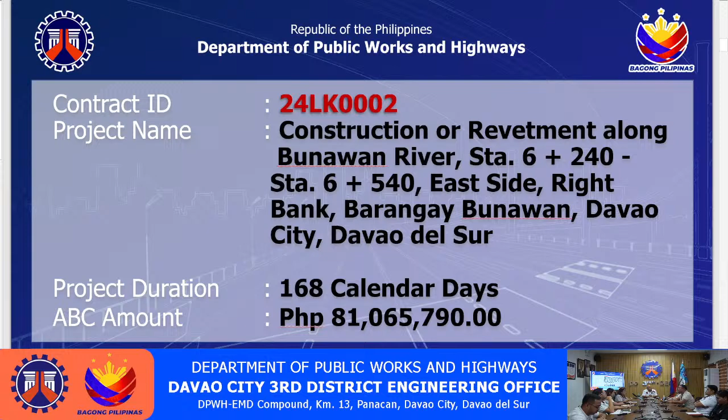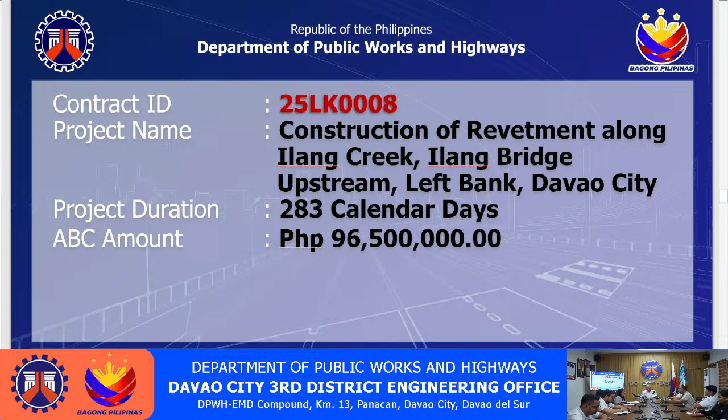For our next project, 25LK0008: construction of revetment along Ilang Bridge upstream, left bank, Davao City, with a project duration of 283 calendar days and an ABC amount of 96,500,000 pesos. Scope of works includes construction of revetment, removal of existing road, bridge demolition, and riprap, with structural steel sheet piles furnished to the specs of 770 mm by 344 mm by 9.1 over 9 mm by 76.2 kilograms per meter.

Z-type hot rolled Larssen interlock. Construction of reinforced concrete box culvert. Construction of concrete slope protection.

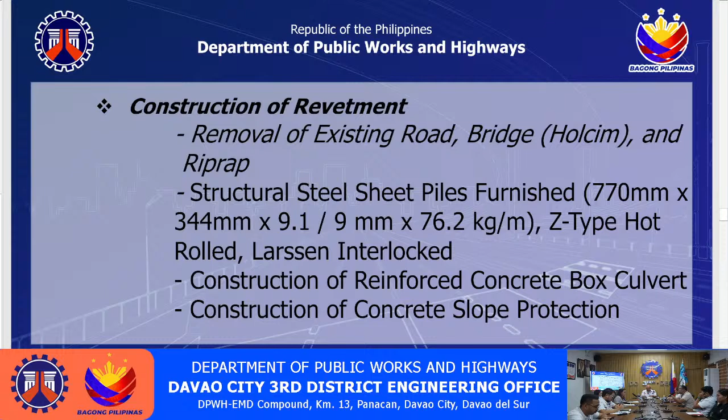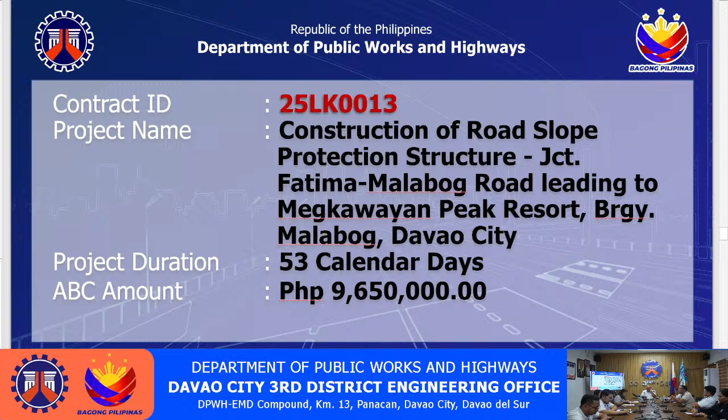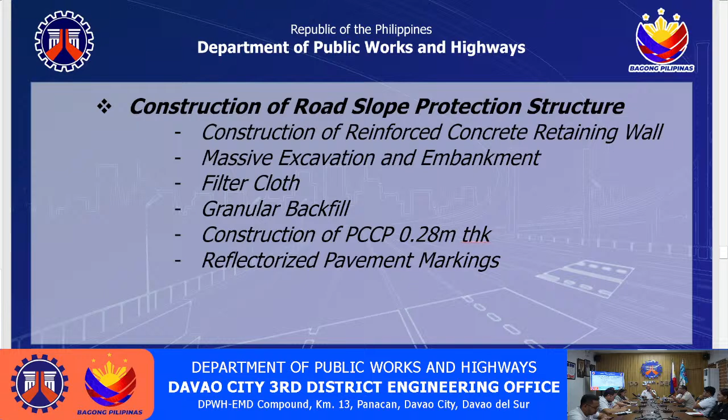Our next project, 25LK0013, construction of road slope protection structure to junction Fatima-Malabog Road, leading to Megkawayan Peak Resort, Barangay Malabog, Davao City, with a project duration of 53 calendar days and an ABC amount of 9,650,000 pesos. Scope of works of the project is construction of road slope protection structure, construction of reinforced concrete retaining wall, massive excavation and embankment, filter cloth, granular backfill, and construction of PCCP 0.28 meter thick and reflectorized pavement markings.

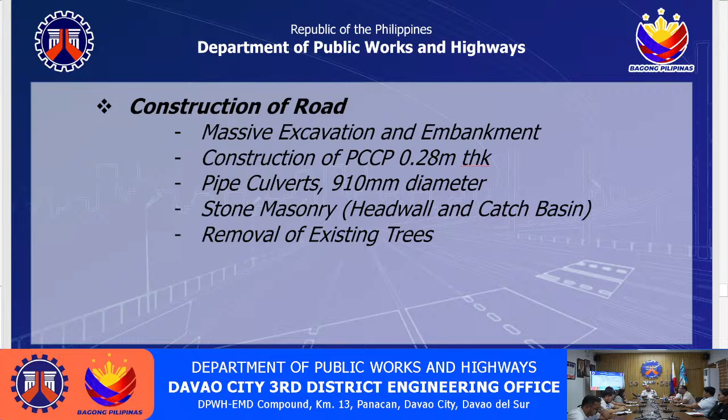For our next project, 25LK0022, construction of road, Barangay Salukadang to Sitio 1515, Paquibato District, Davao City, with a project duration of 155 calendar days and an ABC amount of 67,550,000 pesos. Scope of the project: construction of road, massive excavation and embankment, construction of PCCP 0.28 meter thick, pipe culverts, 910 mm diameter, stone masonry for head wall and catch basin, removal of existing trees.

For our next project, 25LK0023, construction of road, Sitio Gatungon to Sitio Sabangsita, Barangay Tapak, Paquibato District, Davao City, with a project duration of 155 calendar days, an ABC amount of 67,550,000 pesos. Scope of works of the project is construction of road, massive excavation and embankment, construction of PCCP 0.28 meter thick, pipe culverts, 910 mm diameter, stone masonry for head wall and catch basin, removal of existing trees.

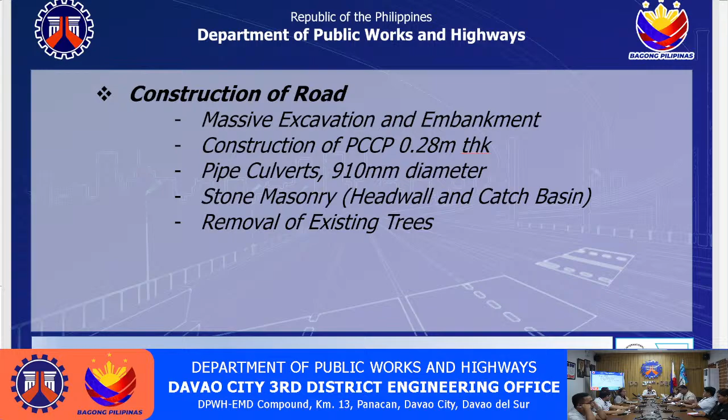For next project, 25LK0030, construction of road, Sitio Barangay Malabog, Paquibato District to Sitio Pulocon, Barangay Lamanan, Malabog Section, Davao City. The project duration of 168 calendar days, and ABC amount of 81,065,790 pesos. Scope of works of the project: construction of road, massive excavation and embankment, construction of PCCP 0.28 meter thick, pipe culverts, 910 mm diameter, stone masonry for head wall and catch basin, removal of existing trees. That's all, ma'am. Thank you.

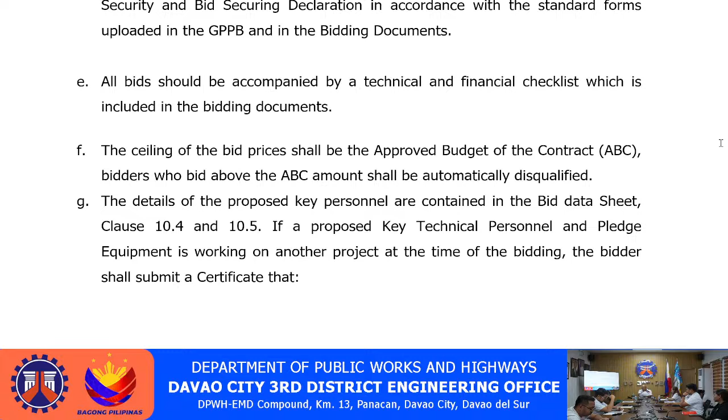All bids should be accompanied by technical and financial checklists, which are included in the bidding documents. The ceiling of the bid prices shall be the approved budget of the contract, ABC. Bidders who bid above the ABC amount shall be automatically disqualified.

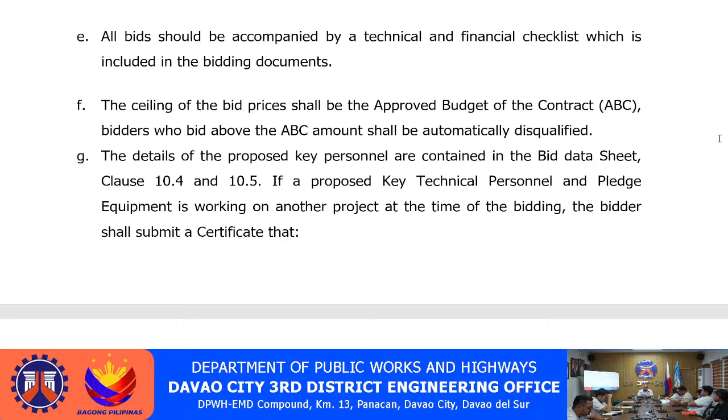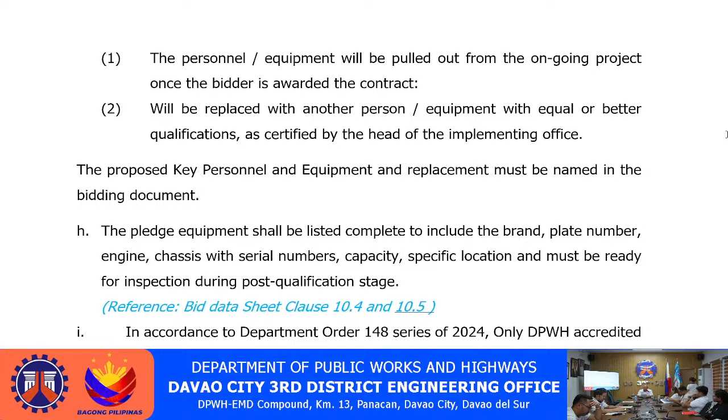The details of the proposed key personnel are contained in the bid data sheet, clause 10.4 and 10.5. If the proposed technical personnel and pledged equipment is working on another project at the time of bidding, the bidder shall submit a certificate that: one, the personnel and equipment will be pulled out from the ongoing project once the bidder is awarded the contract; two, will be replaced with another person or equipment with equal or better qualifications as certified by the head of the implementing office. The proposed key personnel and equipment replacement must be named in bidding documents.

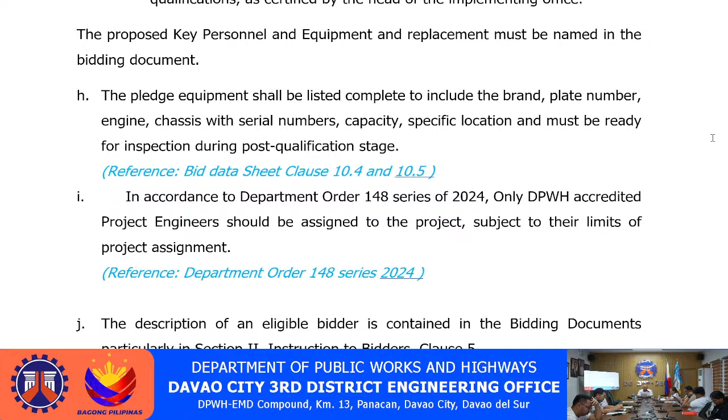The pledged equipment shall be listed complete to include the brand, plate number, engine, chassis with serial numbers, capacity, specific location, and must be ready for inspection during post-qualification stage. Reference: bid data sheet clause 10.4 and 10.5.

In accordance with Department Order 148, Series of 2024, only DPWH accredited project engineers should be assigned to the project, subject to their limits of project assignment. Reference: Department Order 148, Series of 2024.

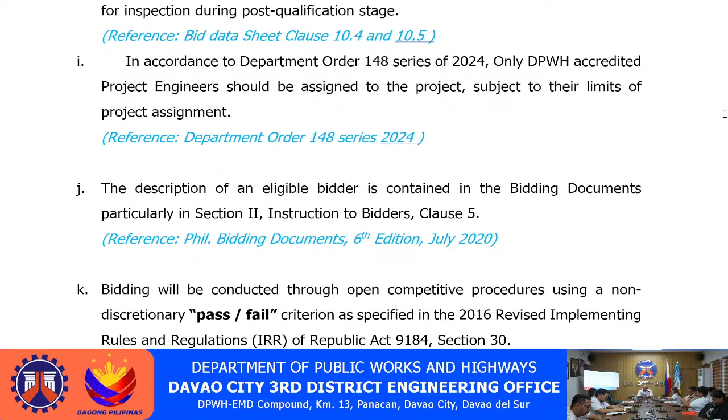The description of the eligible bidder is contained in the bidding documents, particularly in Section 2, Instruction to Bidders, Clause 5. Reference: Philippine Bidding Documents, 6th edition, July 2020.

Bidding will be conducted through open competitive procedures using a non-discretionary pass-fail criterion as specified in the 2016 Revised Implementing Rules and Regulations, IRR, of Republic Act 9184, Section 30. Reference: Republic Act 9184, IRR 2016, page 45 to 46.

Detailed evaluation for lowest calculated bid and lowest calculated responsive bids shall be evaluated by the technical working group for recommendation of award. All bids must be accompanied by a bid security in any of the acceptable forms and in the amount stated in Section 2, Instruction to Bidders, ITB, Clause 15. Reference: Philippine Bidding Document 6th edition, July 2020.

Each page of the document shall be signed by the bidder or a duly authorized person. If a corporation, a secretary's certificate shall be attached.

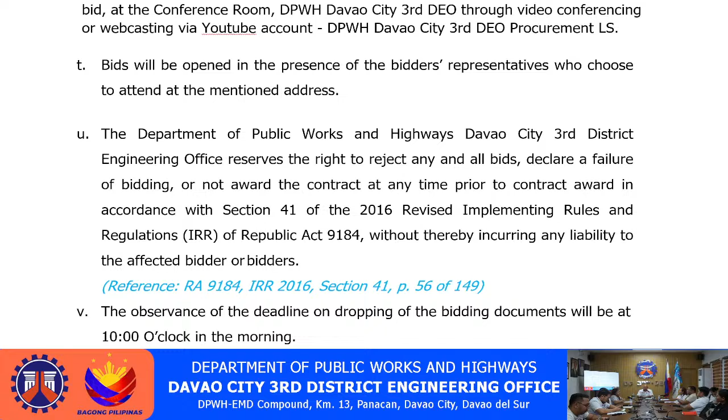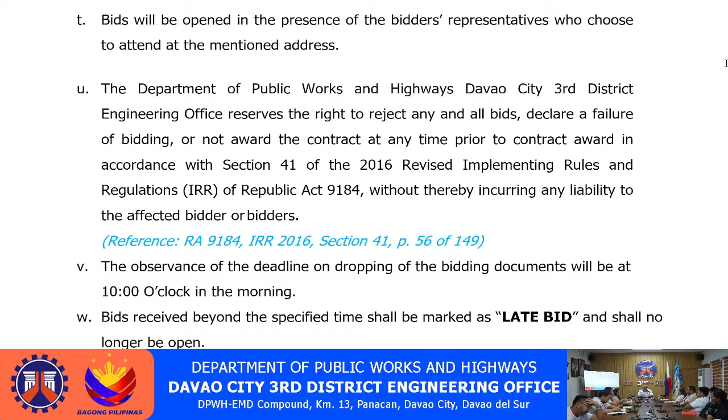The Department of Public Works and Highways, Davao City 3rd District Engineering Office, reserves the right to reject any and all bids, declare a failure of bidding, or not award the contract at any time prior to contract award, in accordance with Section 41 of the 2016 Revised Implementing Rules and Regulations, IRR, of Republic Act 9184, without thereby incurring any liability to the affected bidder or bidders. Reference: Republic Act 9184, 2016, Section 41, page 56 of 149.

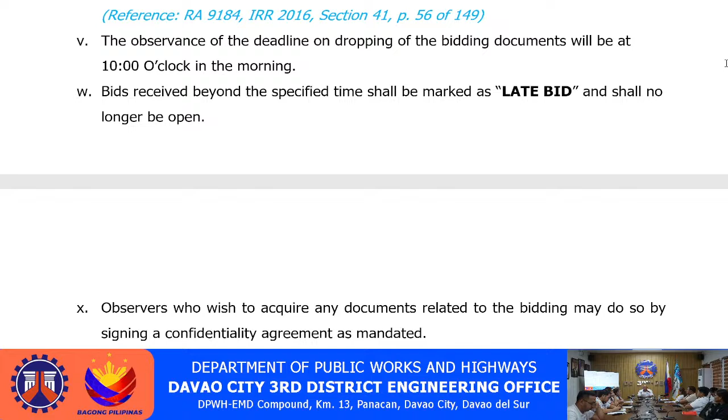The observance of the deadline on dropping of the bidding documents will be at 10 o'clock in the morning. Bids received beyond the specified time shall be marked as late bid and shall no longer be opened.

Observers who wish to acquire any documents related to the bidding may do so by signing a confidentiality agreement as mandated.

Are there any questions from the observers and live streaming viewers?